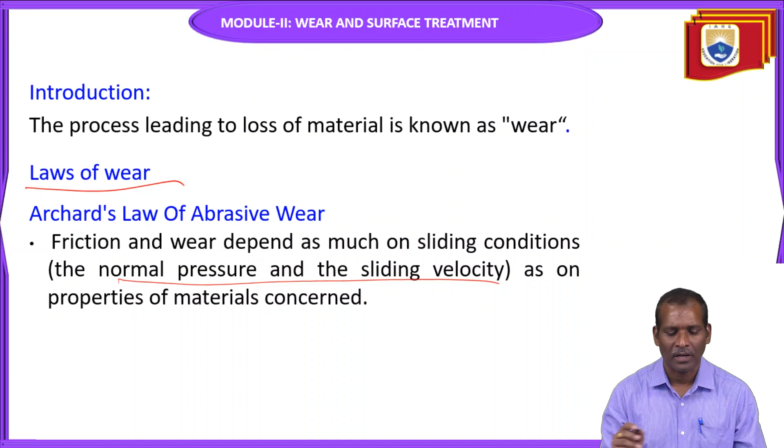So what are the sliding conditions? One is sliding velocity, another one is normal pressure. According to this Archard's law, normal pressure and sliding action are necessary for wear. So that is mechanical wear - it is a result of mechanical action. Whenever the two surfaces are in relative motion, whenever there is a mechanical load, there is compulsory mechanical wear.

In this, two things are important: one is normal pressure, and sliding action during the application of load. Therefore, the wear process depends on this rubbing process. According to the rubbing conditions, the wear rate is determined.

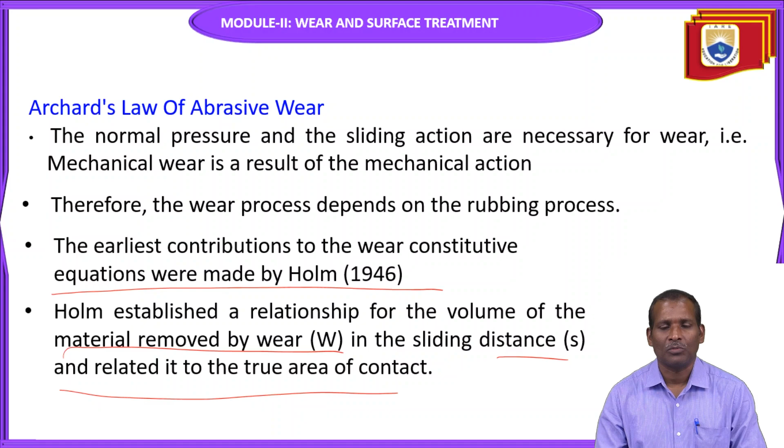So who made the earliest contributions to the wear constitutive equations? In 1946, Holm established a relationship between the volume of material removed by wear, that is W, and the sliding distance, that is S, related to the true area of contact. According to Holm, this relationship between W and S - where S is sliding distance and W is volume removed by wear - is given by the equation: W is equal to K into Pn into S by H.

In 1953, Archard formulated the wear equation of this form: the volume of material removed, that is W, is directly proportional to the sliding distance and the normal pressure, and the dimensionless wear coefficient K. We can write this in the next equation. It is also inversely proportional to the hardness of the surface being worn, that is 1 by H.

So with the help of the dimensionless wear coefficient, we write K into Pn into S by H. Here K is the dimensionless wear coefficient and depends upon the wear rate and the material properties. Next is the sliding distance S, and the normal pressure Pn. The hardness of the surface is inversely proportional, represented by H, since wear also depends upon the hardness of the material.

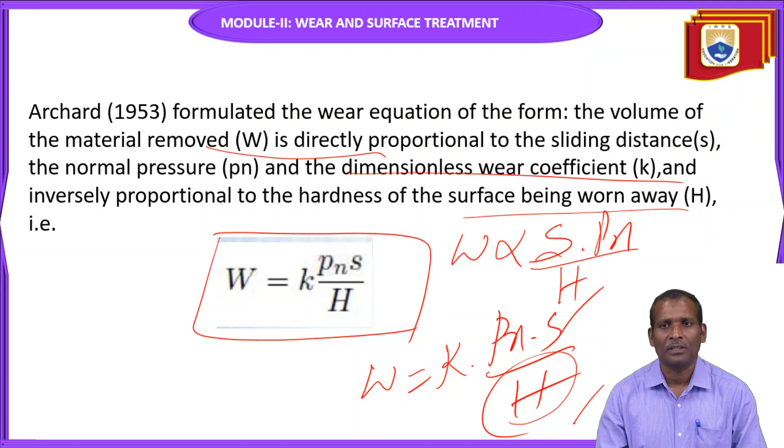Nowadays it is generally recognized that wear is related to the wear coefficient, the pressure, and the sliding distance. So generally they recognize wear with the help of this wear coefficient K, pressure, and sliding distance.

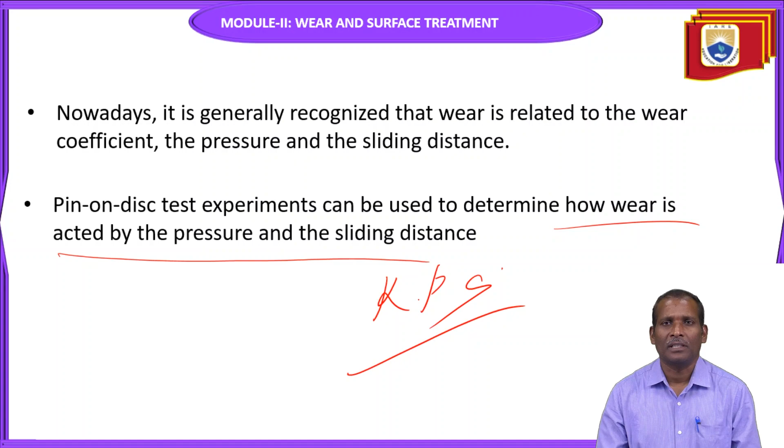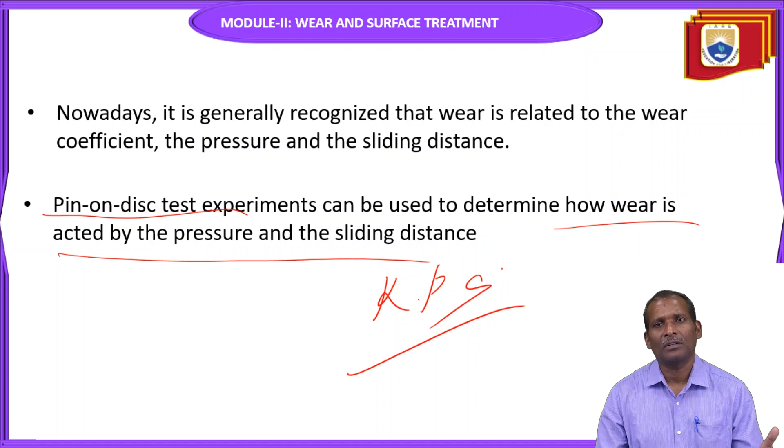The pin on disc test experiment can be used to determine how wear is affected by the pressure and the sliding distance - how much pressure acted, and how much wear happened due to this sliding. The pin is sliding on this disc; I will explain this in later slides. There is equipment called the pin on disc, and this machine is used to determine the wear and friction properties of a particular material.

According to the Archard equation, wear rate W is directly proportional to normal load and inversely proportional to hardness. W is the normal load on contact, H is the surface hardness of the wearing material, and K is the wear coefficient, which is dimensionless. So W equals K into W by H. Here the wear coefficient K by H is called the dimensional wear constant, and its unit is volume per load per meter. So you can write this relationship between wear, normal load, and the wear coefficient like this.

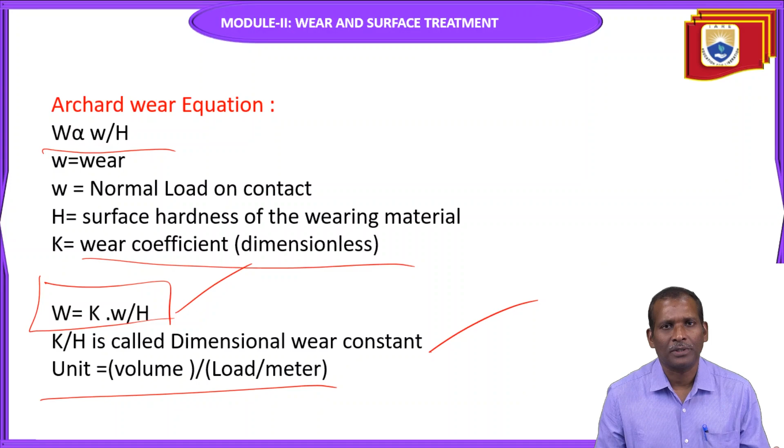Now come to the pin on disc test. The pin on disc wear test is carried out according to the ASTM G99 standards. This is the test carried out per that ASTM standard. The parameters used in this pin on disc test are load, sliding velocity, and sliding distance.

This figure shows the pin on disc apparatus. The disc is here, and the pin is shown here, with the applied load here. In between, this polymer block is there, and then the wear track, shown here. In this setup, the pin slides on the disc. Whenever the disc starts to rotate, the pin also moves in a sliding way according to the applied load.

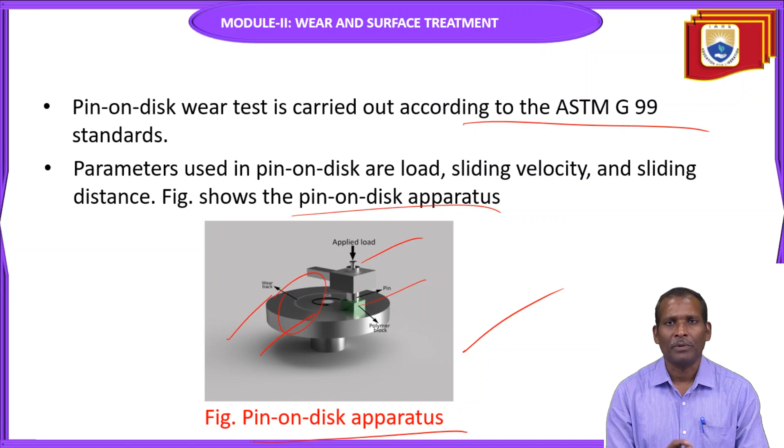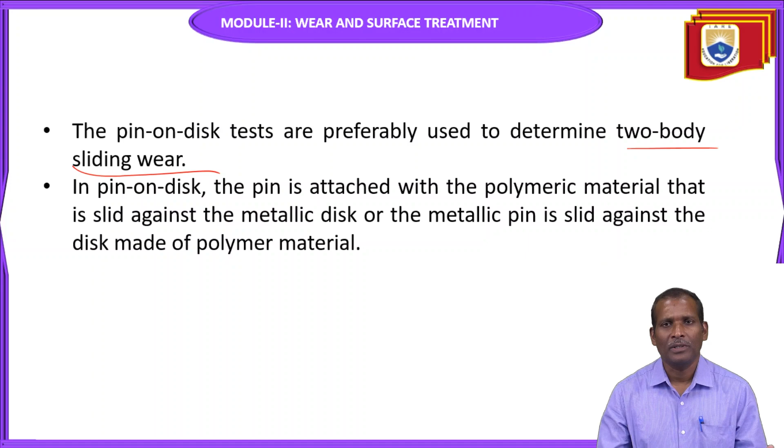After some time, there is wear between this pin and disc. The disc material is separate and different from the pin material. The pin on disc test is preferably used to determine two body sliding wear. In this setup, the pin is attached with polymeric material, as already shown in the diagram. That slides against a metallic disc, or a metallic pin slides against a disc made of polymer material. The disc can also be made of polymer material, and the pin slides on this disc.

Next, theoretical wear models. The theoretical wear models are mathematical or computational frameworks used to describe and predict the mechanisms and rates of material removed due to wear. So the wear model predicts the mechanism and rate of material removal due to wear, which you can calculate. In the previous pin on disc test, we can also calculate the wear rate and friction rate of a particular material, and similarly calculate different material properties.

So finally, for research purposes, you can suggest a good material.

These models are developed based on the fundamental understanding of the physical and chemical processes involved in wear. They are essential tools for engineers and researchers to design, optimize, and troubleshoot systems subjected to wear.

So these are essential tools for researchers to design, optimize, and troubleshoot systems that are subjected to wear. These are called theoretical wear models.

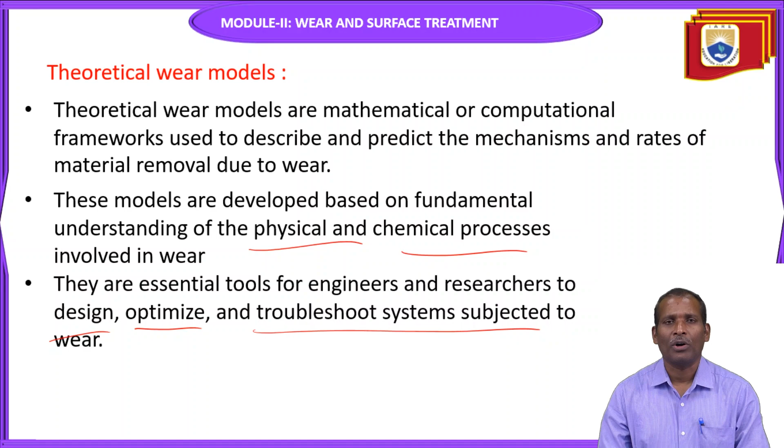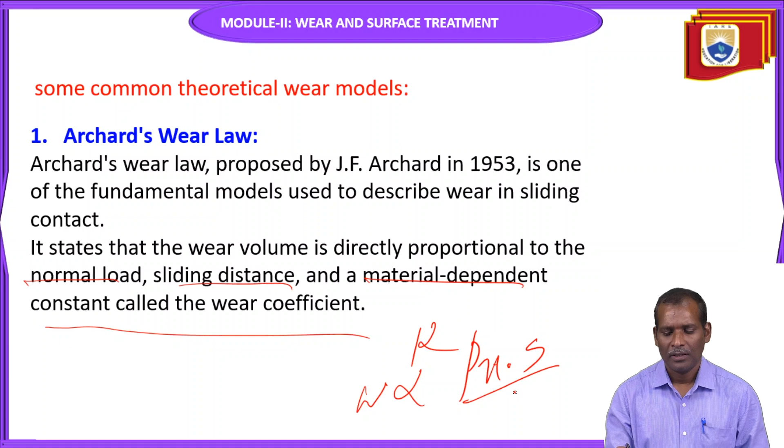Next, adhesion and abrasion models. These models focus on the adhesive and abrasive wear mechanisms, which we have studied in earlier sessions. What do we mean by adhesive and abrasive wear mechanisms? They involve material transfer and removal due to surface interactions between two contacting bodies.

So there is material removed due to the surface interaction with each other. They often incorporate parameters such as surface roughness, contact pressure, and sliding velocity to predict wear rates.

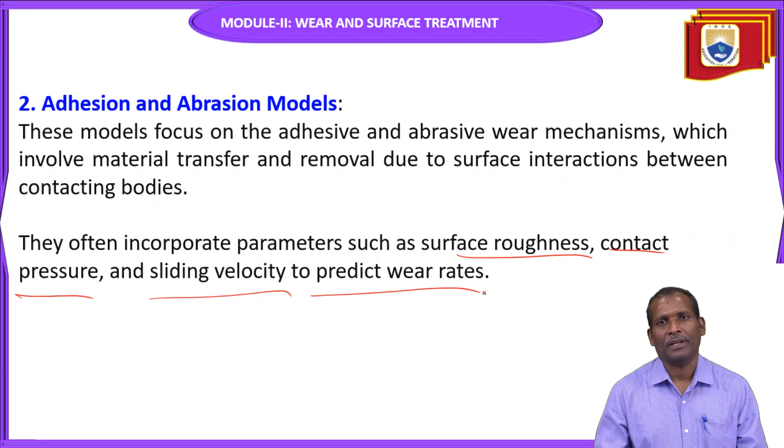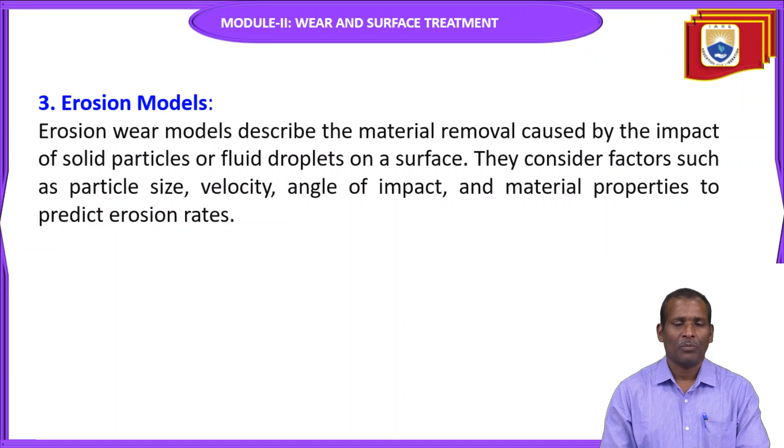Next, erosion models. Erosion wear models describe the material removal caused by the impact of solid particles or fluid droplets on a surface. They consider factors such as particle size, velocity, angle of impact, and material properties to predict erosion rates.

Next, fatigue wear models. Fatigue wear occurs due to cyclic loading and can lead to surface cracks and material spalling. Whenever a component is subjected to cyclic, repeated loads, it leads to surface cracks and material spalling. This phenomenon is called fatigue, and the resulting wear is called fatigue wear. Fatigue wear models consider factors such as stress amplitude, number of cycles, and material properties to predict fatigue induced wear.

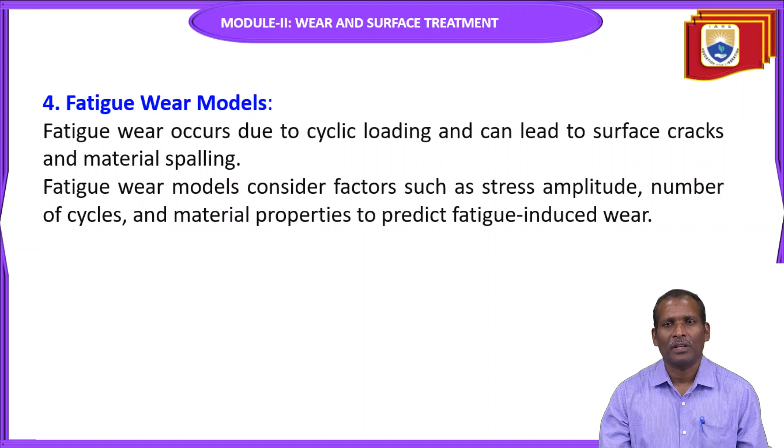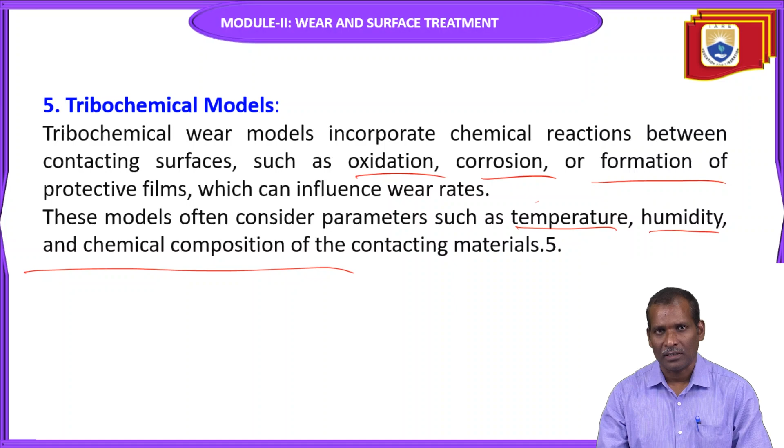Next one is the tribochemical models. Tribochemical wear models incorporate chemical reactions between contact surfaces. Whenever surfaces are in contact or in relative motion, there is a chemical reaction between them. These chemical reactions are oxidation, corrosion, and formation of protective films, which can influence wear rate. These models often consider parameters such as temperature, humidity, and the chemical composition of the contacting materials.

Next is wear particle generation models. In systems where particles are generated, such as in lubricated contacts, models are used to predict the size distribution, shape, and concentration of wear particles based on parameters such as contact geometry, lubricant properties, and operating conditions. Based on these parameters, the wear particle generation model naturally predicts the size, shape, and particle distribution.

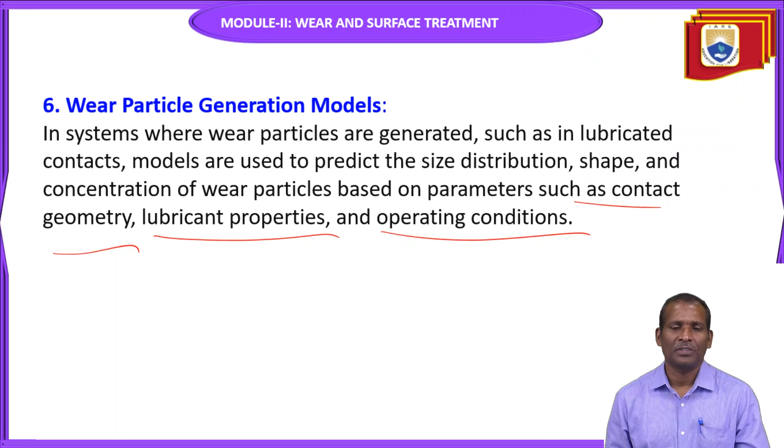Next one is wear map models. Wear map models categorize wear regimes based on the dominant wear mechanisms, for example adhesive, abrasive, and fatigue, along with parameters such as contact pressure, sliding velocity, and temperature. These maps help in selecting appropriate materials and lubricants for specific operating conditions, based on the type of wear mechanism, whether adhesive, abrasive, fatigue, or other mechanisms like erosion. This comes under the wear map model.

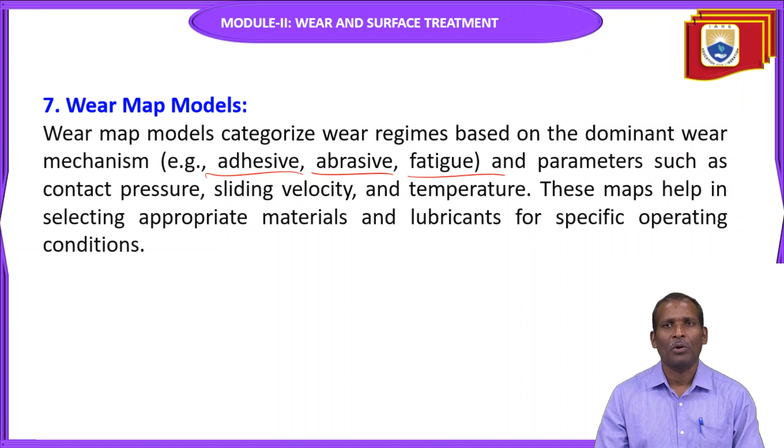8, finite element analysis (FEA) and computational fluid dynamics (CFD). These two are simulation processes generally used in mechanical components to know the stress distribution and flow properties. These simulations are often used to complement theoretical wear models by providing detailed predictions of how stress distribution, fluid flow, temperature gradients, and complex geometries influence wear behavior. So these two also come under theoretical wear models: finite element analysis and computational fluid dynamics model.

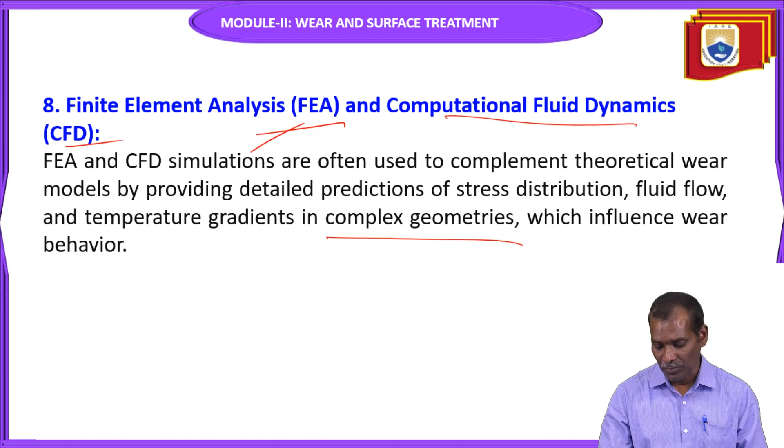So these theoretical wear models are continuously refined and validated through experimental observations and measurements to improve their accuracy and applicability across various industries and applications, so that you can optimize the various design parameters based on these observations.

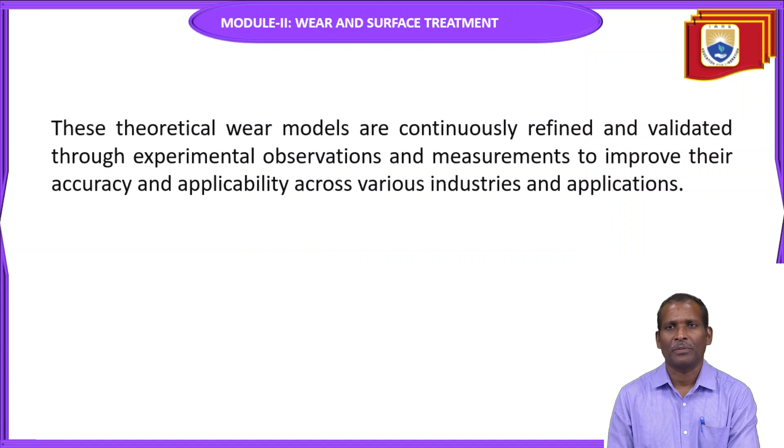Next topic is wear of metals. First, abrasive wear. Metals can experience abrasive wear when subjected to the rubbing or scraping of hard particles against the surface. Whenever there is rubbing between two surfaces, there is abrasive wear. This type of wear occurs in machinery components that come into contact with abrasive materials or environments.

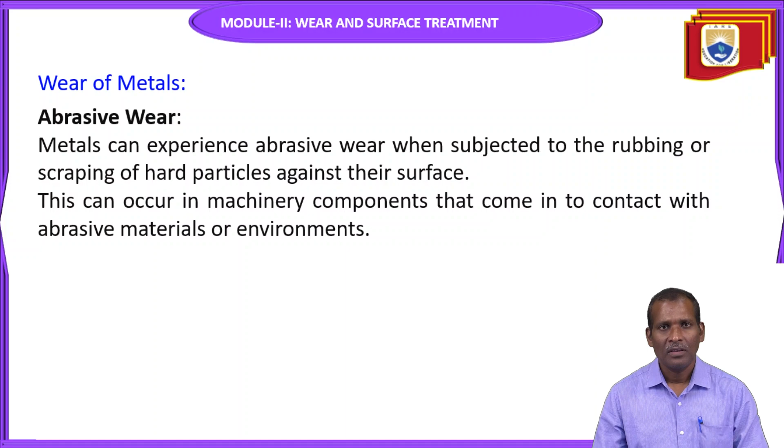Next, adhesive wear. Adhesive wear in metals involves the transfer of material from one surface to another due to high contact pressures and temperatures. This can lead to localized welding between the surfaces, followed by material tearing upon separation.

This type of joint is sometimes called a welded joint due to the adhesive property.

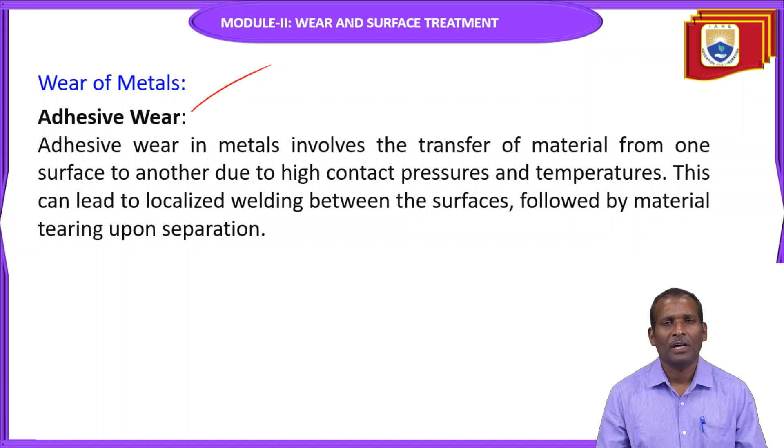Next, erosive wear. Materials can undergo erosive wear when exposed to the impact of solid particles, liquids or gases. This is common in industries such as mining and manufacturing, where high velocity fluids or abrasive particles cause surface degradation through impact loads and exposure to solid particles, liquids, and gases, resulting in material loss. This type of wear is called erosive wear.

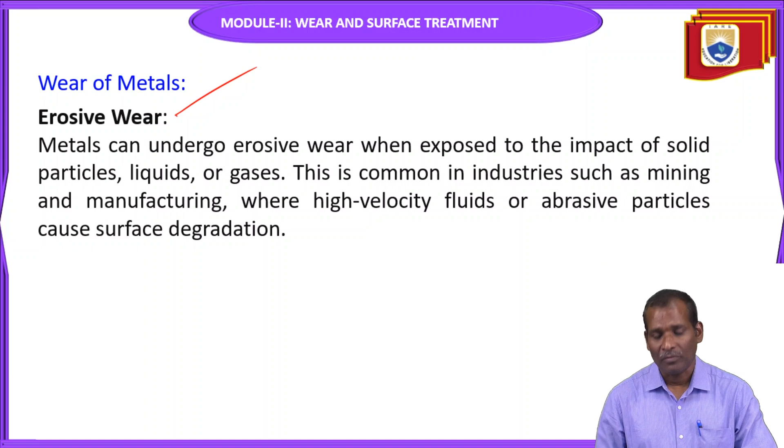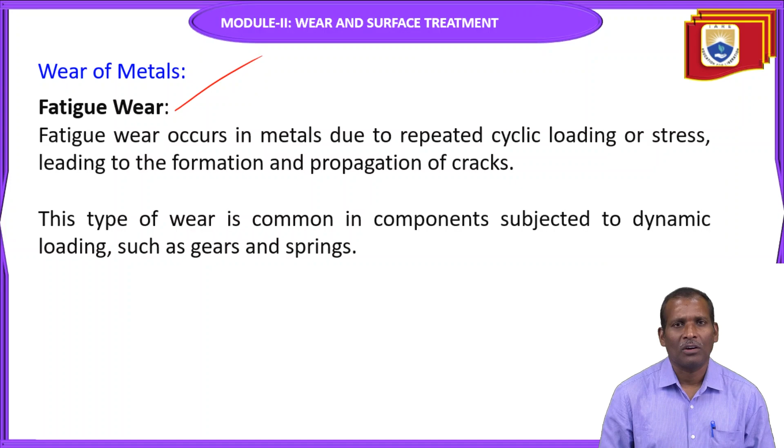Next is fatigue wear, which I have already studied. It occurs in metals due to repeated cyclic loading or stress, leading to the formation and propagation of cracks. This type of wear is common in components subjected to dynamic loading, seen in mechanical components like gears and springs.

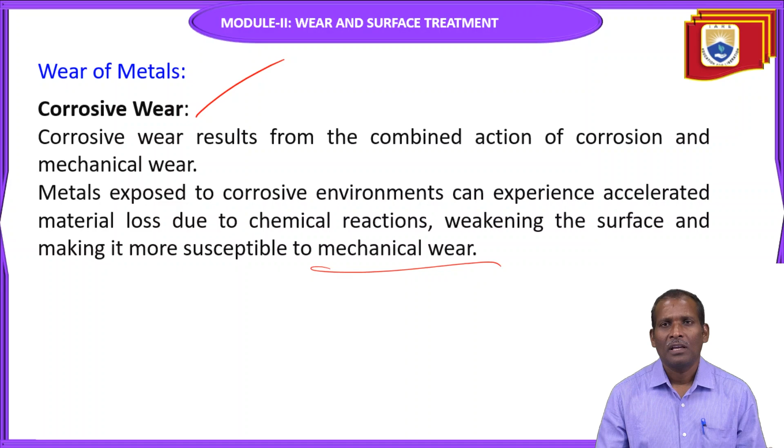Next, corrosive wear results from the combined action of corrosion and mechanical wear. Metals exposed to corrosive environments can experience accelerated material loss due to chemical reactions, weakening of the surface and making it more susceptible to mechanical wear. This type of wear happens due to the combined action of corrosion and mechanical wear.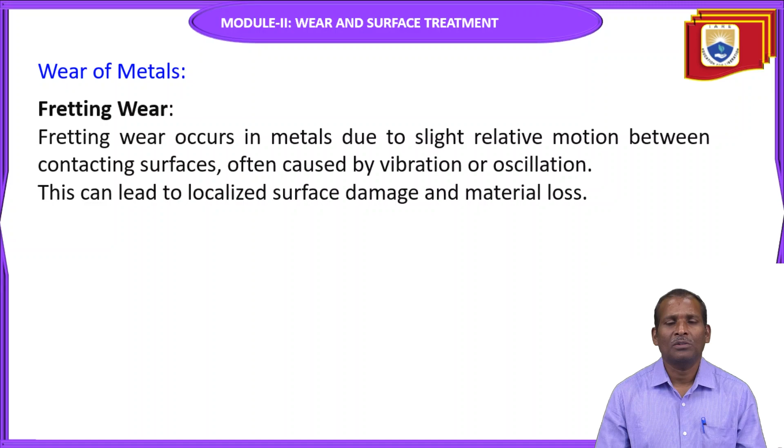Fretting wear occurs in metals due to slight relative motion between contacting surfaces, often caused by vibration or oscillation. This can lead to localized surface damage and material loss.

Next, similarly the wear of non-metals follows the same types as metals, but here we consider non-metallic materials. Polymers and ceramics can experience abrasive wear when subjected to abrasive particles or surfaces, which can lead to gradual removal of material and surface degradation.

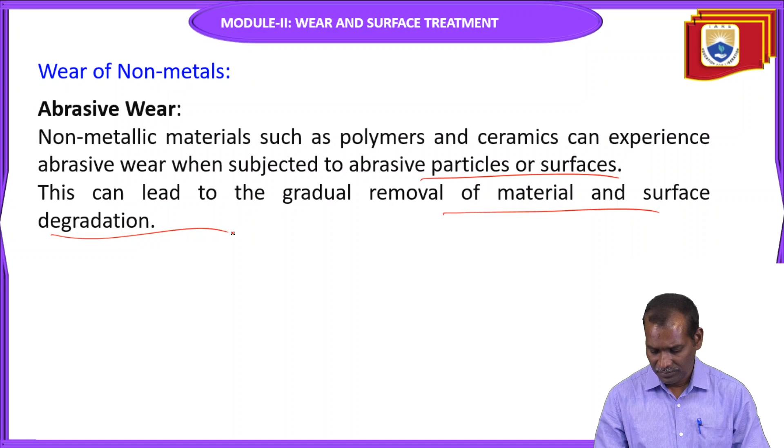Next, adhesive wear. The adhesive wear in non-metals involves the transfer or removal of material due to high contact pressures and temperatures. This can occur in applications where non-metallic materials come into contact with each other under sliding or rolling conditions. This type of wear is adhesive wear in case of non-metals.

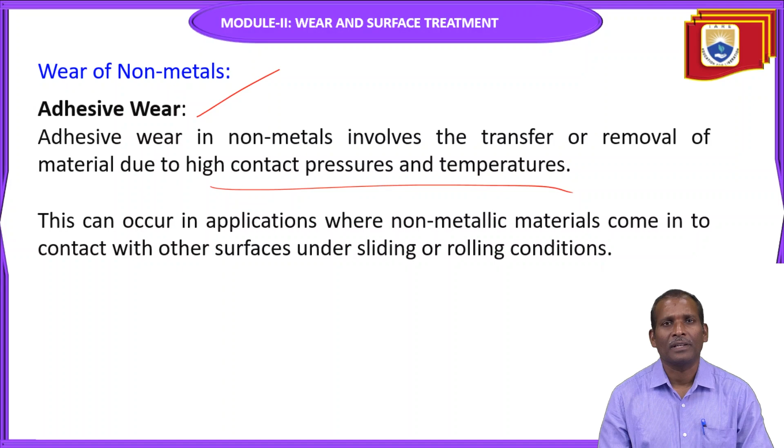Next is erosive wear. Non-metallic materials can undergo erosive wear when exposed to the impact of solid particles, liquids, or gases. This type of erosion wear happens in some industries, and is common in applications such as erosion of polymers in pipelines carrying abrasive slurries.

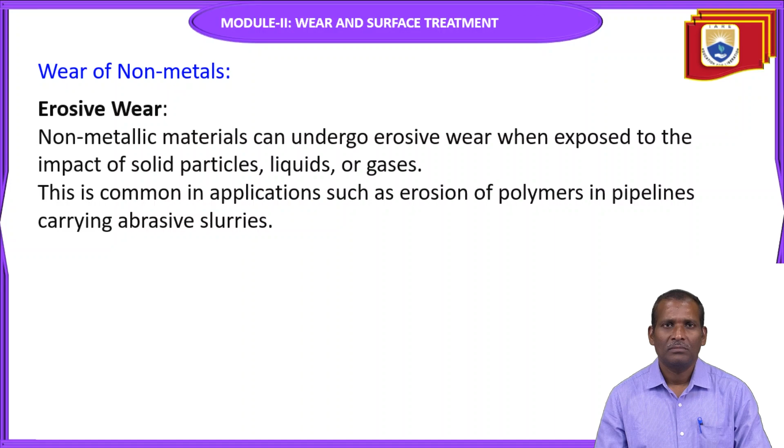Next, fatigue wear. While less common, some non-metallic materials can experience fatigue-like wear under cyclic loading, leading to crack formation and eventual failure. This can occur in polymers and composites subjected to repeated mechanical stresses, causing fatigue wear whenever the component is subjected to such stresses.

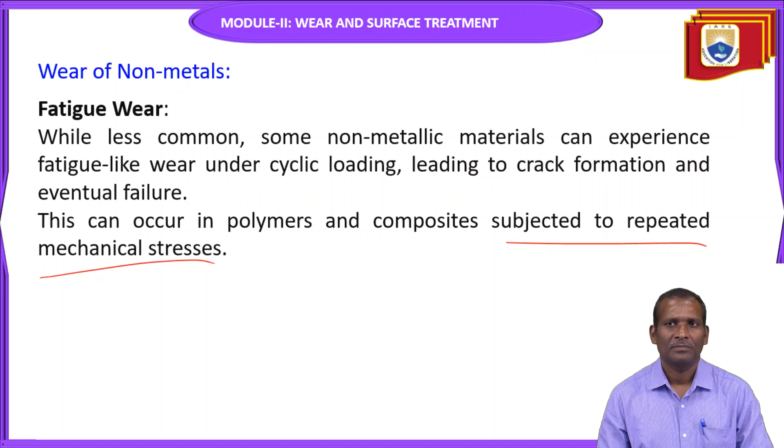Next, corrosive wear. Non-metallic materials may degrade due to chemical reactions with their environment, leading to a loss of mechanical properties and eventual wear. This is particularly relevant for polymers exposed to harsh chemicals or UV radiation.

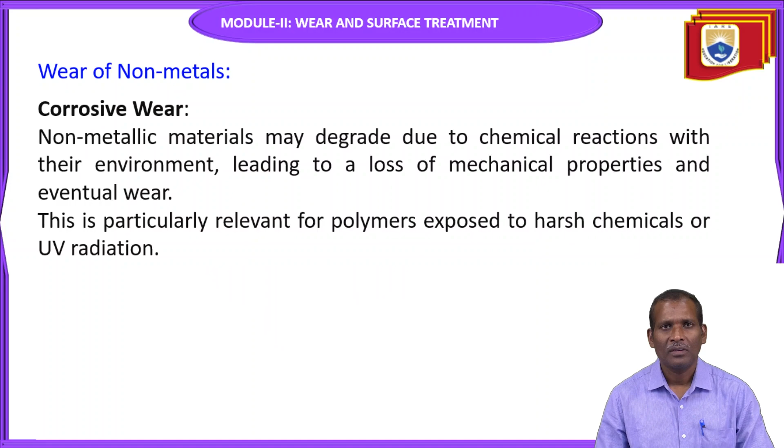Next, fretting wear. Same as metals, fretting wear in non-metals can occur due to slight relative motion between contacting surfaces, leading to surface damage and material loss. This is especially relevant in applications where polymers or composites are used as seals or bearings.

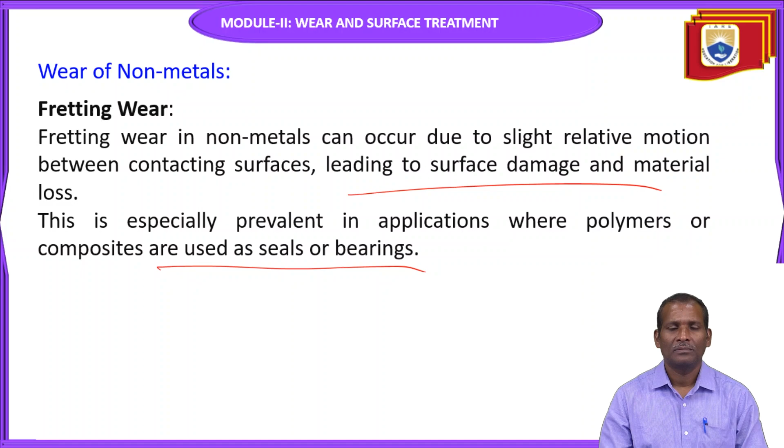Understanding these wear mechanisms for both metals and non-metals is crucial for designing materials and components with improved durability and performance. Whenever you want to design any component in a mechanical machine element, you should understand the wear mechanisms of both metals and non-metals, and based on the properties you can design and improve the durability and performance of the component.

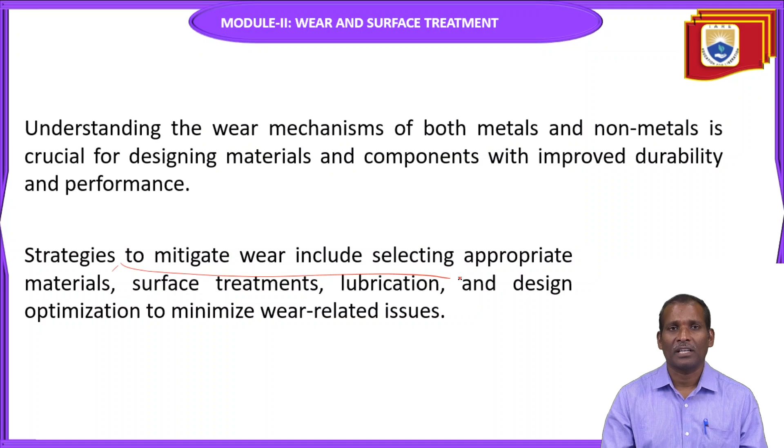The strategies to mitigate wear include selecting appropriate materials, surface treatments, and proper lubrication, along with design optimization to minimize wear-related issues. You can think of a better material, select a proper design, select a proper operation, and select appropriate design parameters. All these strategies help minimize wear-related issues.